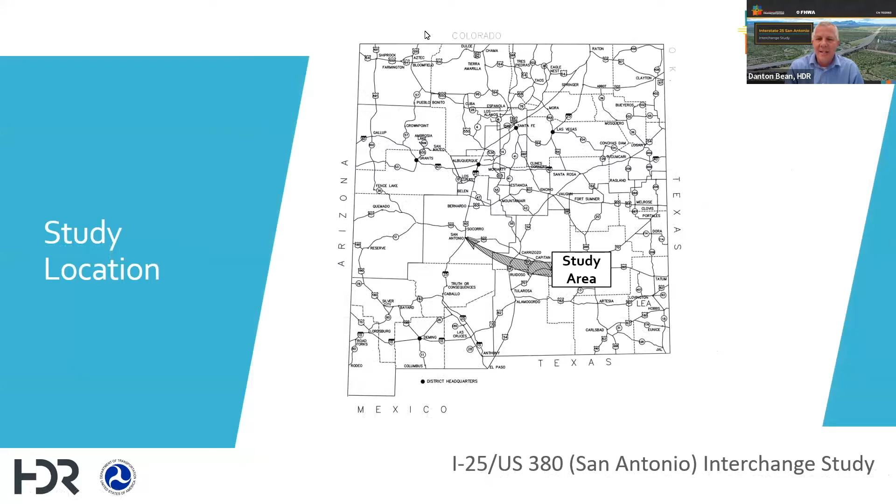So first, I want to describe the location of this study. The study area is just outside the community of San Antonio, about 10 miles south of Socorro, and about 90 miles south of Albuquerque.

The study area consists of the interchange of I-25 and US 380 and all the ramps of the interchange, between milepost 139 and 140 on I-25, and approximately a half a mile of US 380. The study area also includes a portion of Walnut Creek, the major waterway through the interchange area.

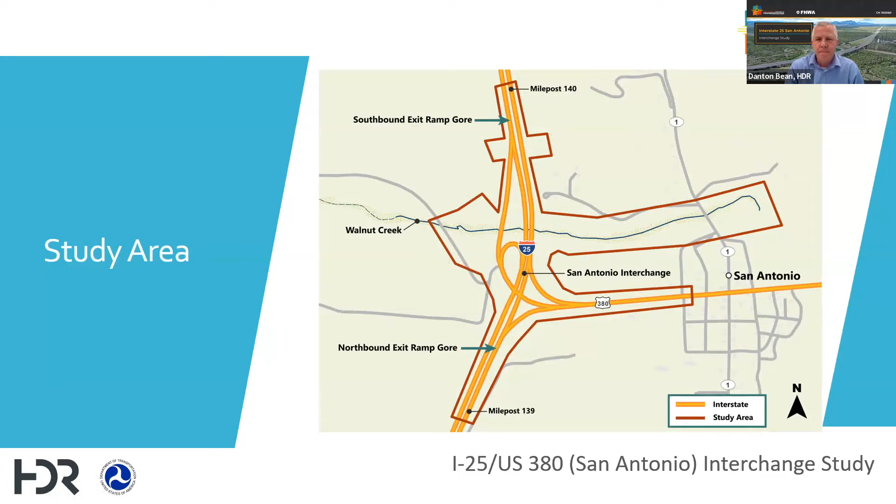All right, so now let's discuss more about the purpose and need. We'll get into depth about the needs that we've identified in the study area. In general, the deficiencies are in the geometry of the interchange, problematic features, and aged and dilapidated elements within the interchange. The purpose of the study is to improve safety, and it will be important to stay focused on that purpose as the study and project develop.

So now I'm going to turn the time over to Ravi for the roadway discipline to talk about the findings.

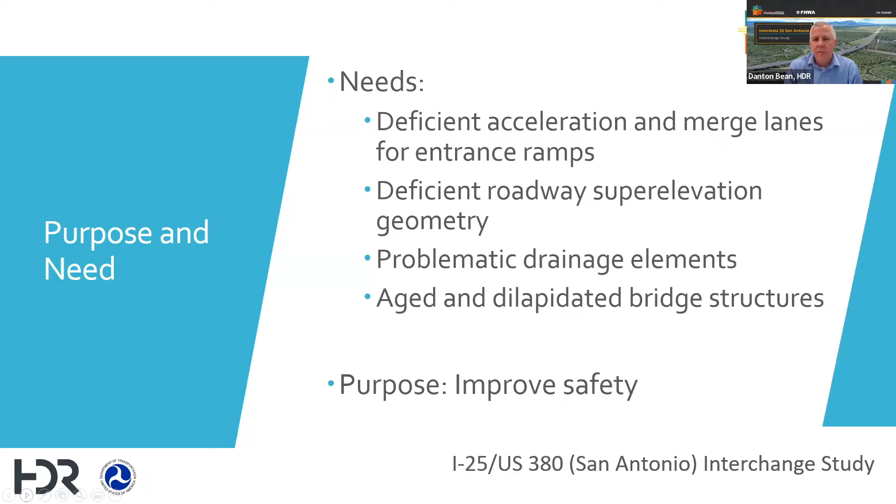Thank you, Danton. I'm Ravi Sripada, and as Danton mentioned, I'm the roadway lead for this project. I'll provide a quick overview of some of the existing geometry deficiencies that we intend to fix as part of the study. As you can see, both northbound and southbound on-ramps have deficient acceleration lengths to safely merge onto I-25 main line. 150 feet is available, while 1,160 feet is required, and for northbound, 1,580 feet is required.

Another safety element our team evaluated is the horizontal geometry of the I-25 roadway system. As the roadway alignment curves, the roadway surface is super elevated to help drivers maintain speed and stay safely on the road through the curve. Super elevation means raising the outer edge of the pavement above the inner edge. The speed limit on I-25 has increased since it was constructed, and now the existing I-25 travel lanes along the curve between US 380 and Walnut Creek do not meet current NMDOT standards. You can see the deficient super elevation along I-25 highlighted in blue on the slide.

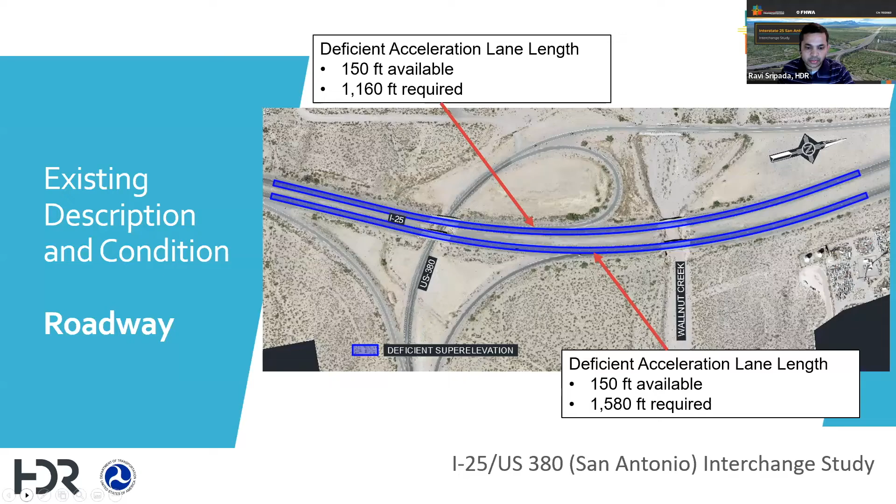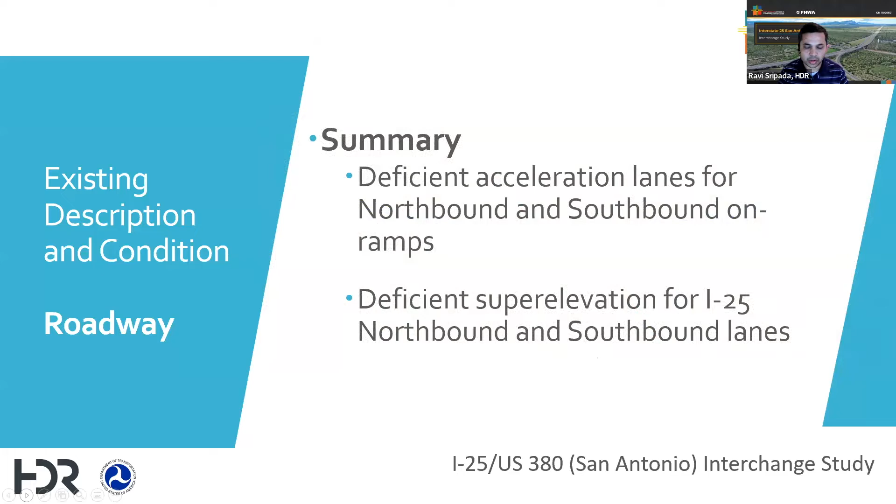In summary, existing on-ramps are not long enough to allow drivers to safely merge onto I-25. Also, the existing I-25 roadway surface along the curve is not sloped enough to meet the current speed of the drivers. Back to you, Danton.

Thank you, Ravi. So now let's talk about the bridge discipline. There are actually 5 structures in the study area that are considered bridges. The first one is bridge number 3168. That structure is a concrete box culvert. It has 20 cells or 20 barrels. It carries the southbound off-ramp over Walnut Creek, and that was built in 1939.

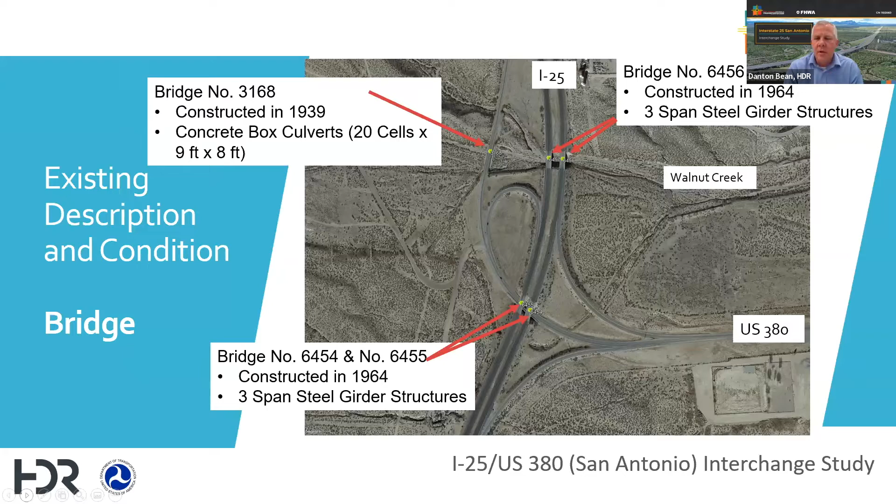The other structures carry I-25 over US 380 or over Walnut Creek. Those were all built in 1964, and they are 3-span steel girder structures. The structures are showing signs of age with cracking of concrete, delamination, and spalling. So in summary, all 5 bridge structures are reaching the end of their design life.

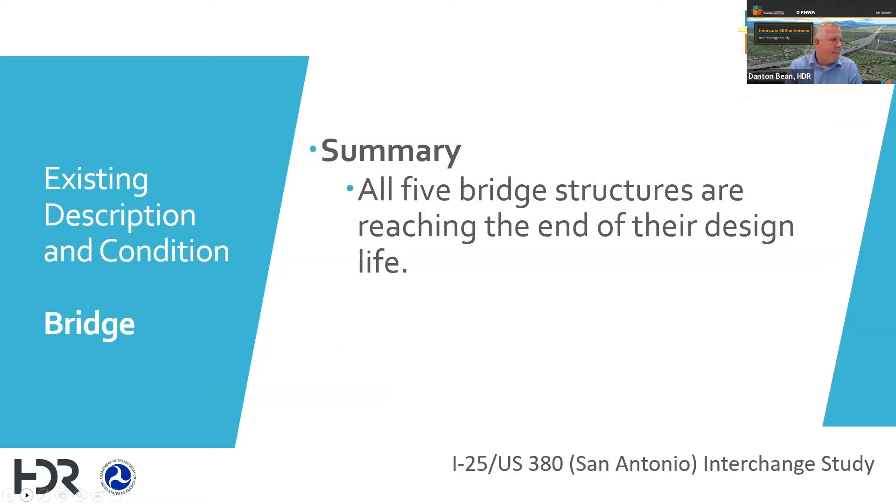So now I'm going to turn it over to Andrew to talk about the drainage discipline. Yeah, good evening. My name is Andrew Wong. I'm the drainage engineer for this study.

The drainage infrastructure for this project involves 19 drainage crossings. Incorporated in that, you have 25 culverts. As Danton said, there are 3 bridges - 2 of them are for I-25 over Walnut Creek, and then there's that 20-box culvert for the southbound off-ramp. So each of these elements has been studied to determine their conditions and whether they have the necessary capacity. Throughout the interchange, we did find significant sediment deposits and evidence of scour.

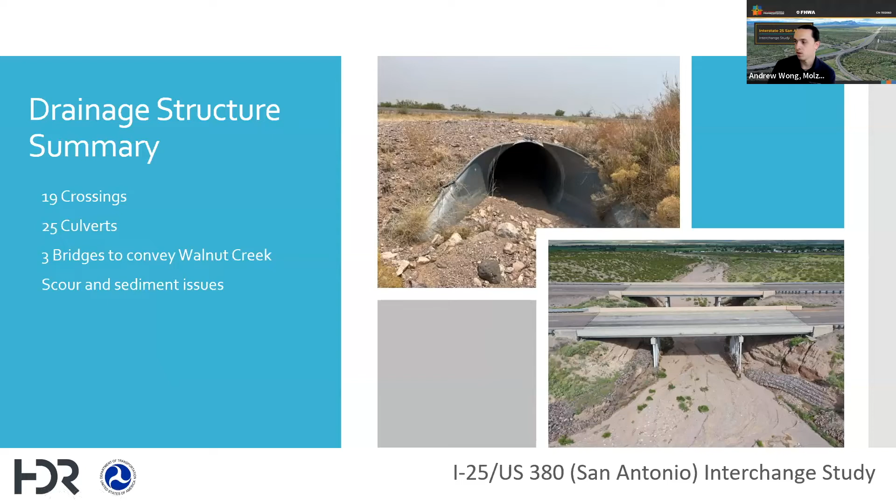So the drainage analysis began with determining how much water will be flowing through each structure. This depends on the size of the basin, the soil conditions, and the amount of rainfall historically experienced in the region. Walnut Creek, which flows through the interchange, is the largest of the drainage basins at over 30 square miles, which results in a peak flow for the 1% chance storm of over 19,000 cubic feet per second.

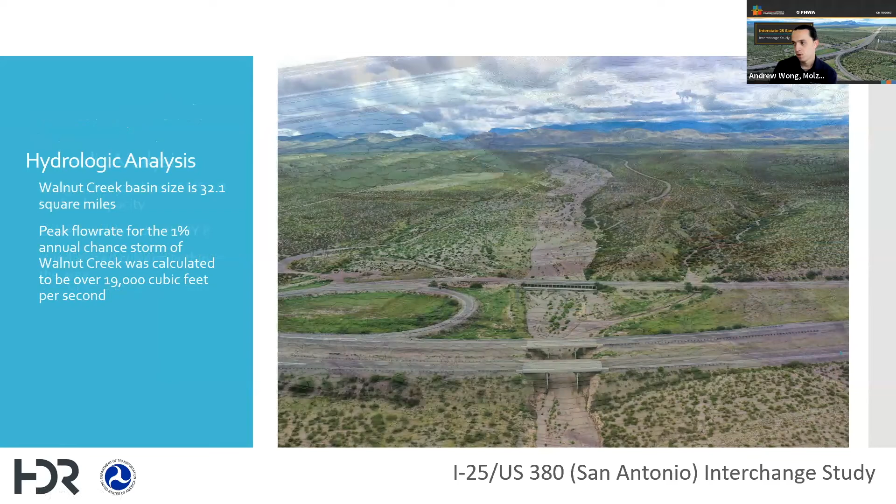So once we have those flows, we can perform the hydraulic analysis. This utilizes various different computer models, most significantly a 2D model that we used to analyze Walnut Creek and the bridges.

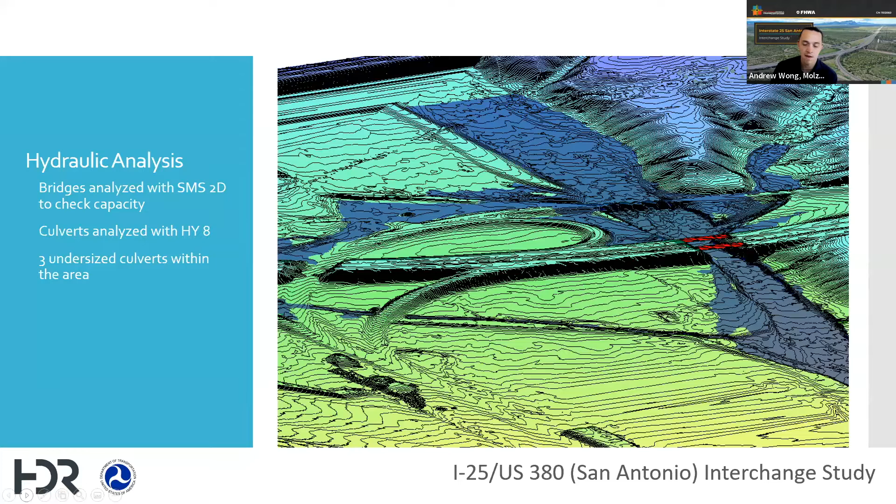So at the bridges, crossing waterways, scour is always a serious concern. Based off of our field visits, we did find quite a bit of erosive scour around the abutments and the piers. There was riprap protecting the slopes, but that has mostly washed away.

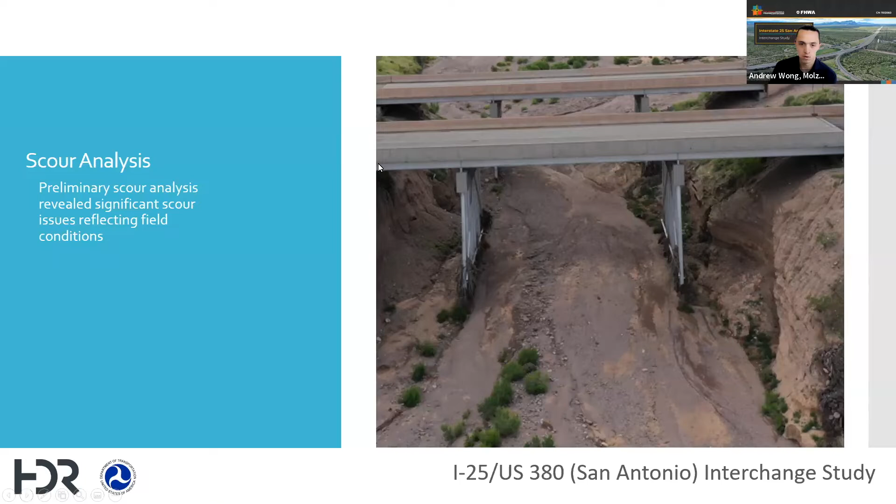There's some short-term projects being done to help stabilize the bridges, but our analysis indicates that these two bridges would benefit from some additional redesign to help ensure that the bridges can remain stable into the future. So I'll turn it back now to Randy to review the public comments we've received and the discussion from our first public meeting.

Thank you very much, Andrew. On November 16th, 2022, we hosted the initial public meeting to introduce this study. Between November 3rd and December 15th, 2022, we received 41 questions and comments, including 12 during our virtual public meeting.

It is important to note that we are listening to what the community is saying, and your comments are very much appreciated. We hear you, and we take what you say very seriously. The study team takes every comment we receive seriously, and we put a lot of value on what you have to say. A majority of the comments we received expressed concern about the current on-ramps, in particular the northbound ramp.

Improving the visibility and the safety of this stretch of highway was very clearly a priority for everyone, in addition to how the improvements will address flood control issues.

The good news is our study team and the public are on the same page. Safety is our number one concern. The issues that were brought up around the northbound on-ramp, the visibility issues, and the geometry of the ramps are all areas that our team has identified as issues that will be addressed by this study.

When it came to questions about traffic and traffic control plans, those plans will be developed in the final design phase of this project. Maintaining all of the movements in the interchange will be a priority for the design team. They will do all they can to limit closures and traffic restrictions. The intention is to leave things open as much as possible to minimize the inconvenience to the traveling public.

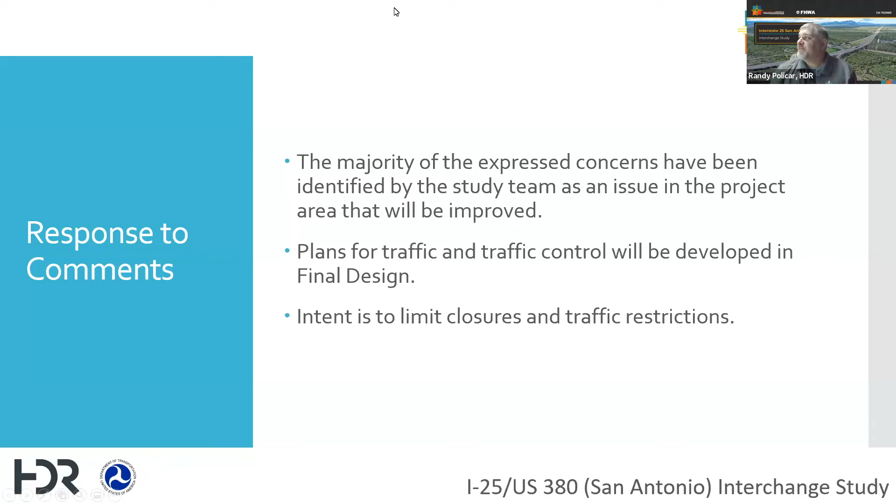We wanted to share with everyone an update to a few comments received from our first public meeting. The first update pertains to Walnut Creek. The NMDOT currently has a project in place to mitigate the erosive conditions at Walnut Creek. Improvements consist of grading, installation of concrete drop structures, gabions, riprap, median drop inlets, and culvert pipes. The construction for these improvements is anticipated to begin in the fall, winter of 2023.

The second update pertains to the existing I-25 northbound and southbound entrance ramps. As mentioned earlier in this presentation, the existing ramps provide deficient acceleration length and merging distance, poor sight distance, and geometry. The NMDOT will be installing advanced signage for I-25 traffic to utilize the passing lane when approaching the entrance ramp merging area. This is the layout for the new signs that will be installed.

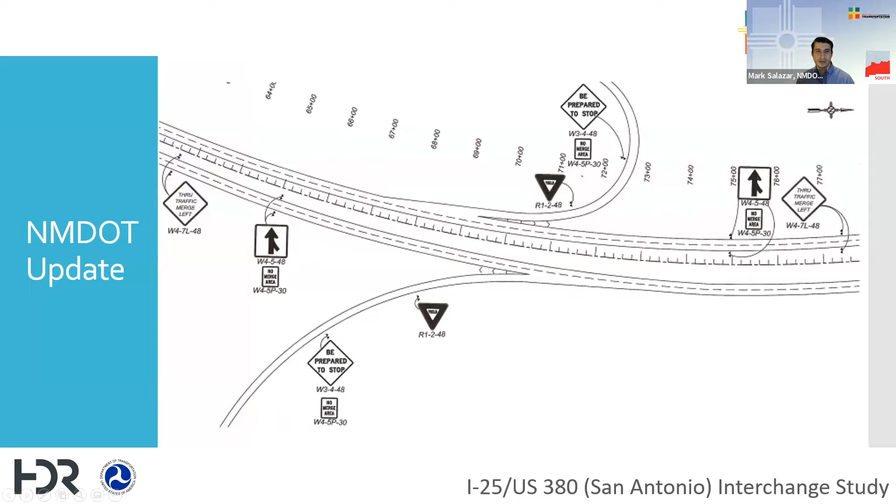The third update pertains to pavement preservation. The NMDOT is pursuing a pavement preservation project for the I-25 main lines from milepost 140 to 150 in the near future, maybe within a year or two, dependent upon funding. This is an exhibit showing the I-25 pavement preservation limits.

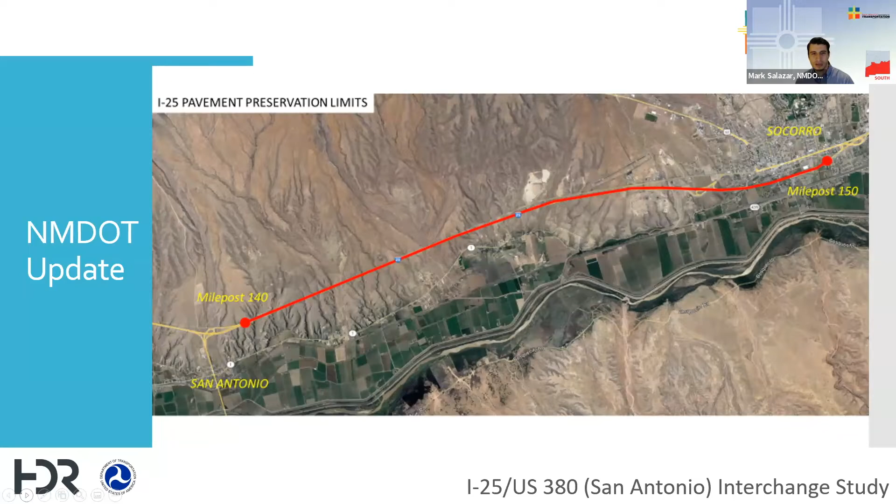I will now turn it over to Danton to continue the presentation. Thanks, Mark. So let's continue talking about our study. We are currently in the study phase. This is the second public meeting in the study effort, and again, to seek your input and comments.

The purpose of the meeting is to go over the alternatives that have been evaluated in detail as part of this phase B and review the comments, the recommendations from the team. We want your insights and feedback to help guide the decision-making process. Once we have received your input, we finish our evaluation process. The study document will be finalized, and we'll identify the improvements to be carried forward.

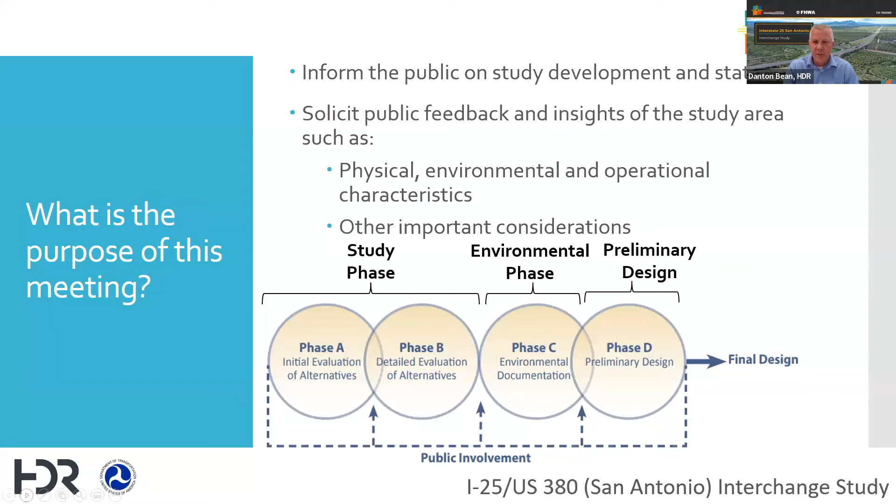Okay, so I won't review all of the needs again, but it's important to keep track of the purpose of the project, and that is to improve safety. Safety is always a top priority for the team, and so we are studying ways to do that. Those needs, again, in general sense, are to improve the geometry, solve some problematic elements, and replace aged and dilapidated structures.

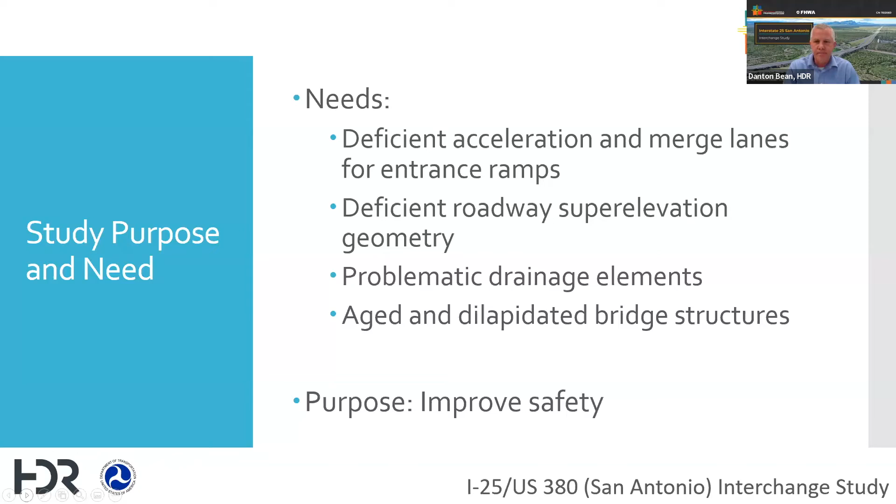So now let's talk about the alternatives that were presented again in the last meeting. We've tried to establish those needs, and these alternatives are the solution. The no-build alternative is always considered in the development of a project. The no-build alternative means that no improvements or modifications would occur. The study team has developed 3 different build alternatives to address and mitigate the issues identified in the roadway, drainage, bridge structures.

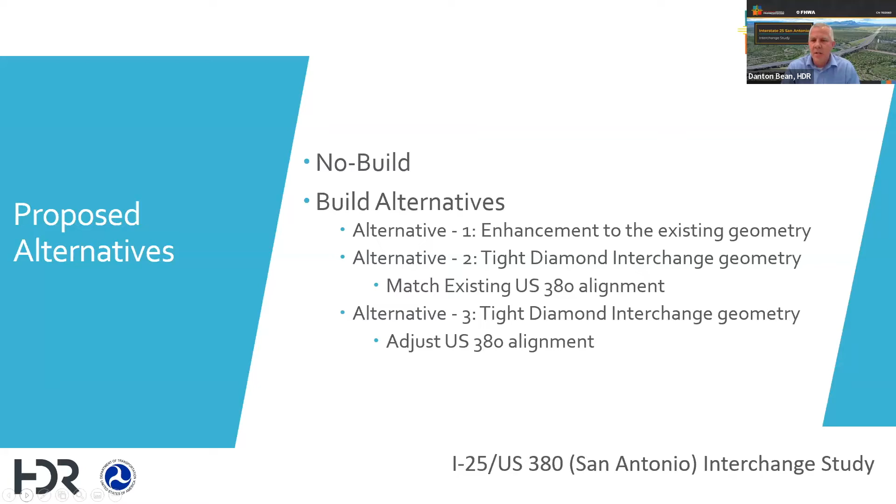The alternatives include: 1, an enhancement to the existing geometry; 2, a tight diamond interchange geometry matching the alignment of US 380; and 3, again a tight diamond interchange, but with an adjustment to the US 380 alignment.

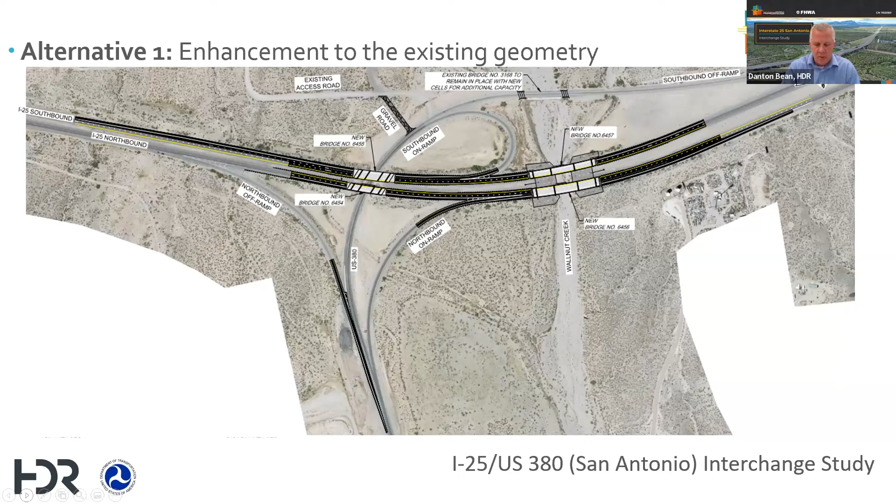So the advantages in this alternative are: first, there's a minimized construction cost, and it stays within the current right-of-way footprint, so there would be no need for additional right-of-way. Also, there's the addition of those proper on-ramp lengths for acceleration and merging onto I-25, and the improvements to Walnut Creek. The disadvantages are that the structure for the southbound off-ramp will remain in place, and that's a potential for flood issues and maintenance issues in the future.

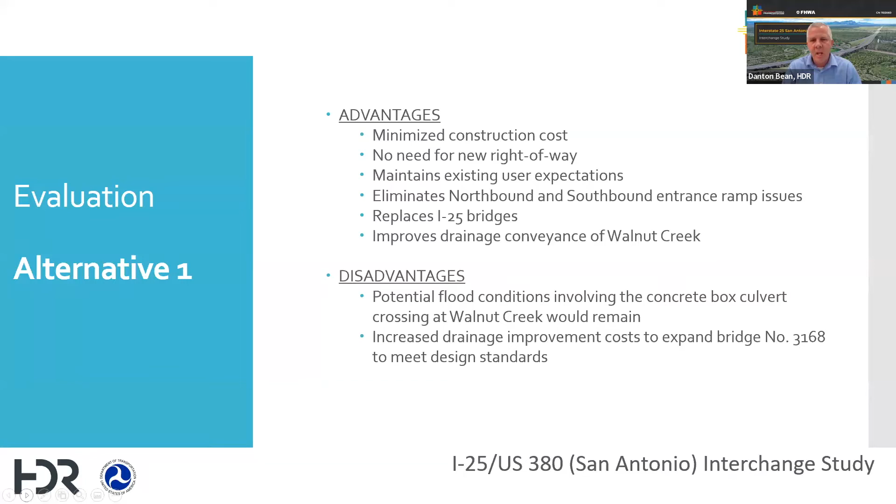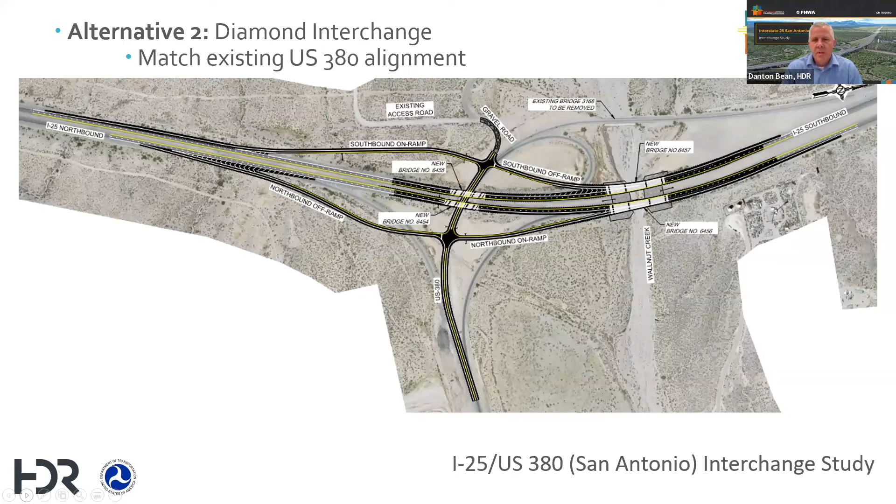So the advantages of this alternative are that it meets current driver expectation. The diamond interchange is a modern interchange type and it meets those driver expectations. It removes that concrete box culvert from the inventory and reduces the risk of flooding. It replaces those bridges for I-25 and improves the drainage conveyance through Walnut Creek. The disadvantages for this alternative are an increased cost compared to alternative one, and it would require temporary closures of US 380 during construction of the bridges, during demolition, girder placement, and deck pours.

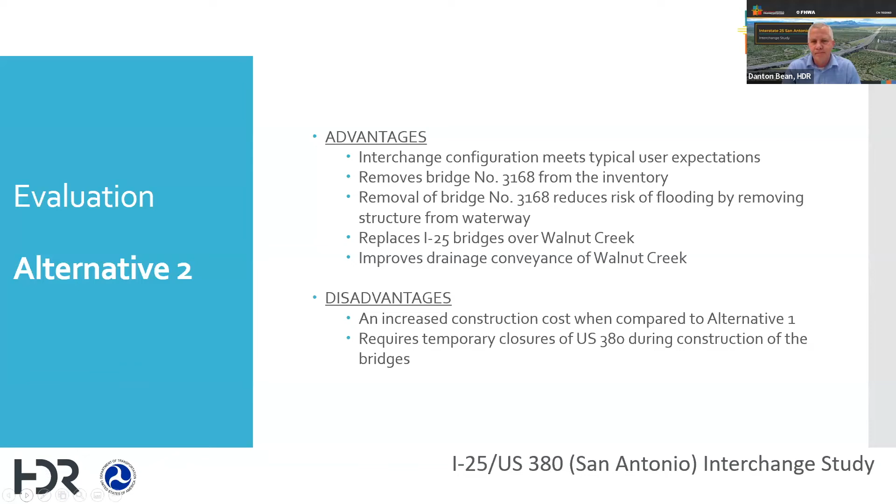Okay, alternative three is similar to alternative two. It is a diamond interchange, and the improvements are again similar, adding ramps that meet current standards, reconstructing I-25 through the horizontal curve to provide the proper super elevation, replacing the bridges on I-25, improving the Walnut Creek channel including erosion control and channel improvements, and removing that structure for the southbound exit ramp over Walnut Creek. So advantages are real similar to alternative number two,

with the exception that this alternative does not require closures of US 380 during construction, and I feel like that was a significant advantage for this alternative. The disadvantages are an increased construction cost compared to alternative one and alternative two, and there would be some right-of-way needed associated with this alternative.

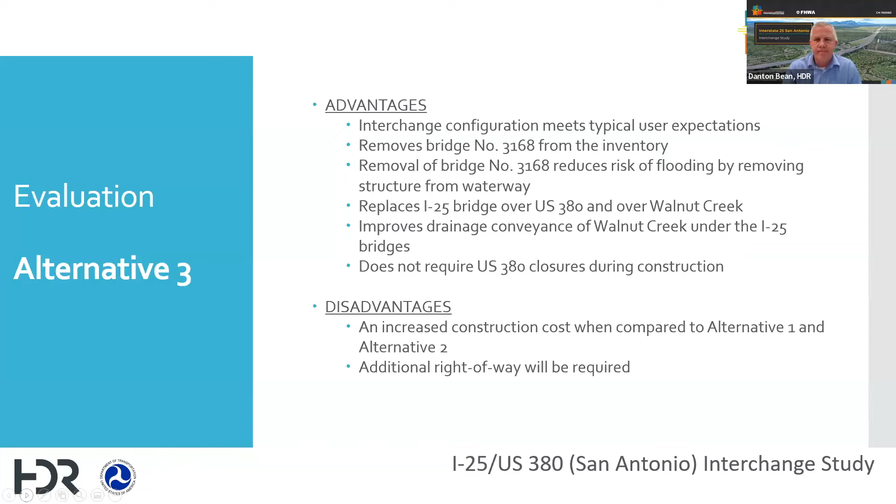All right, now I'm going to turn it back to Andrew to give us some information on the proposed improvements for the drainage system. Yeah, so each of the alternatives that Danton described would involve some drainage improvements. There are a few priorities we'd keep in mind for each of them. The first would be to make sure none of the improvements have any negative impacts on the downstream areas. The second priority is to make sure the new interchange doesn't flood and will continue to be operational for the design storms. And finally, the goal is also to reduce the regular maintenance required due to scour and sedimentation, and to help extend the operational life of the project far into the future.

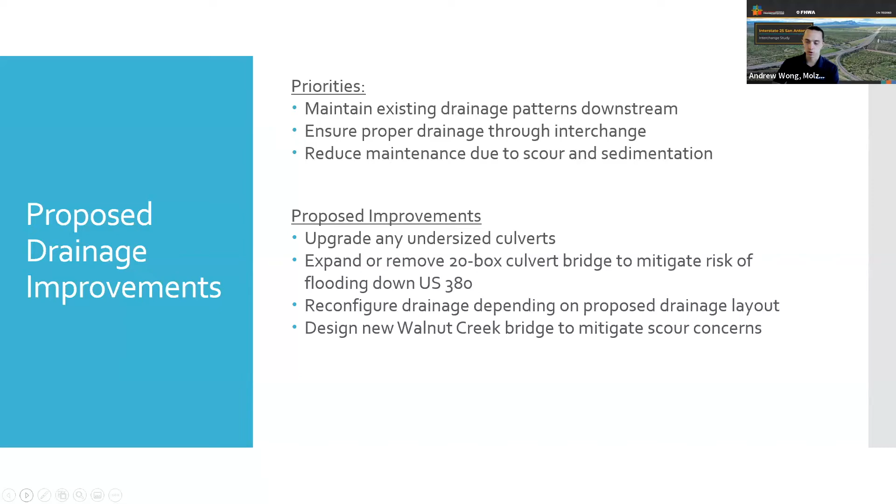So for this interchange, we are recommending that any undersized culverts be upgraded. There are a few that will need to be removed or extended depending on how the interchange is modified. Each of the proposed alternatives involves either improving or removing the 20-box culvert that contributed to the 2018 flooding, so that would no longer be a concern. The most significant drainage improvement is recommending that the Walnut Creek Bridge be redesigned to help benefit water flow through the channel, as well as reduce the scour concerns for that bridge. Back to you, Danton.

Okay, so now let's talk about the evaluation process the team went through with these alternatives. We evaluated each alternative considering the purpose and need, or how well does this alternative fulfill the purpose of the project and the needs of the area. The second criteria was cost, which includes construction cost, right-of-way costs, and future maintenance costs. We also looked at these alternatives with engineering factors and environmental factors.

The other thing important in this discussion is to recognize the evaluation scoring. We evaluated these alternatives from very positive, which we represent with a double plus sign, to very negative, which we represented with negative symbols.

I won't repeat the purpose and need of the area, but it's important to remember that we're trying to improve safety to keep us on track on that target. The no-build alternative really does nothing to improve safety, so it is evaluated as very negative. The other alternatives do improve safety, and we've evaluated them as very positive.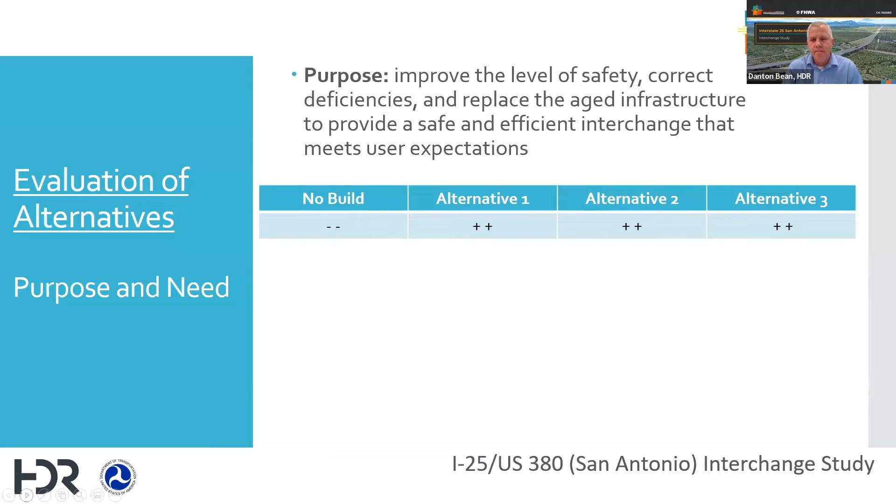Now on the cost criteria, all of the alternatives will require some cost, either construction or future maintenance. We've scored the no-build and alternative number one as negative. No-build would require future maintenance costs, and alternative one has elements of construction cost. Alternatives number 2 and 3 have higher construction costs and are evaluated as very negative.

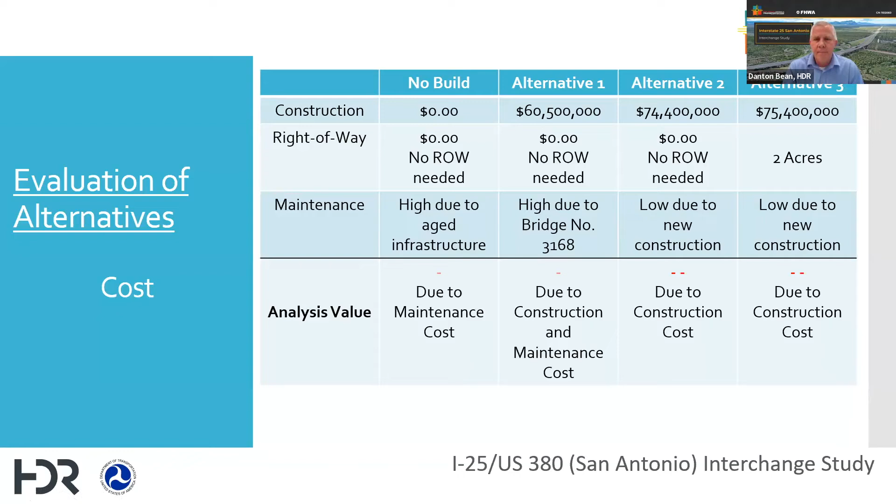Now let's talk about the engineering factors. For the evaluation of these categories, we examined each alternative with the categories listed in the first column. This slide shows how each alternative was ranked for the different categories. I won't discuss in detail the evaluation of each category, but I'm going to try to summarize the differentiating aspects of the evaluation.

The no-build alternative was valued as very negative for several categories. First was safety - there's no improvements for safety, and the entrance ramps would stay as is. Second, maintenance - the old infrastructure would require significant effort to keep them going. Third is drainage - no improvements to Walnut Creek is a concern for the team. These negative scores for the no-build alternative really eliminated it from consideration. The study team will not recommend the no-build alternative.

Now let's talk about another differentiating criteria. In the first public meeting, we heard how important it is for you, the public, those that are users, to maintain traffic flow through the area during construction. So we put significant weight to that category, and it's a significant differentiator for the alternatives. Alternative number 1 will have a significant impact to traffic during construction and is valued very negative. The construction of those ramps to add acceleration and merge length would require closure during construction, so we value that as very negative.

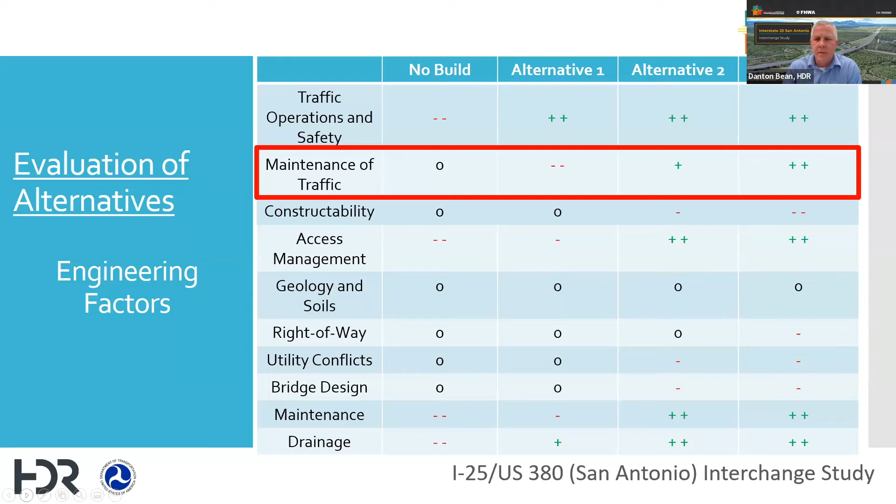Now let's talk about the environmental categories, and I'll turn it over to Maria to help with that discussion.

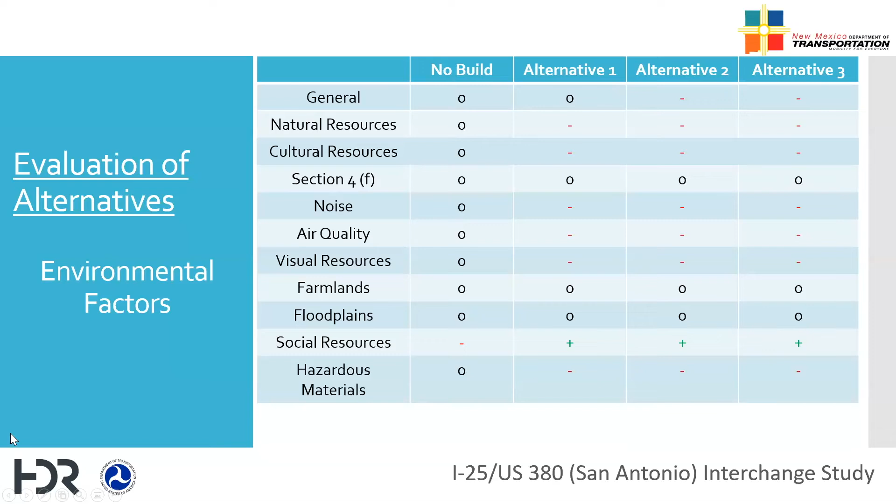Thanks, Danton. My name is Maria Altemus. I am the environmental planner with HDR for the project. When looking at the three alternatives, we examined each of the resources or categories listed in the first column there on the screen in relation to the no-build and the three action alternatives. You'll see how each category was ranked based on the criteria, or the scoring method that Danton described before. So 0 is neutral, minus is negative, and plus is positive.

You'll see that overall, the no-build alternative has a negligible or no effect on almost all the categories, since if there isn't anything built, it won't be affecting the environment. The only category where the no-build has an effect one way or the other is social resources, which takes into account community resources, demographics, and economic and land issues. The no-build alternative would have a negative effect on social resources because it wouldn't improve the interchange, and the interchange is a safety concern for drivers and community members in the area. The build alternatives would have a positive effect because they'll improve the interchange, upgrade the bridge, and improve safety.

Moving up to the first row, when we look at the general environmental setting, alternative 1 stays within the existing right-of-way and the existing roadway alignment, so there really wouldn't be an effect to the general environmental setting. Whereas for alternatives 2 and 3, the roadway alignment is slightly shifted and would impact the environmental setting slightly from its current condition, hence the slightly negative impact there.

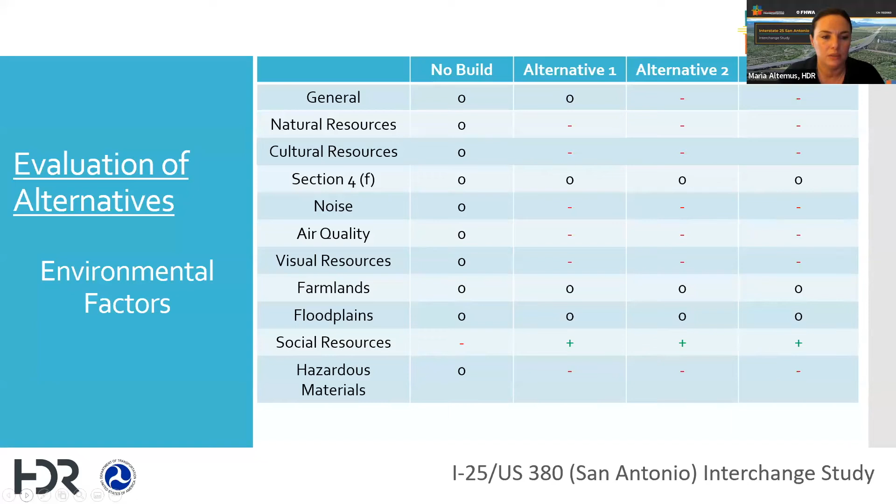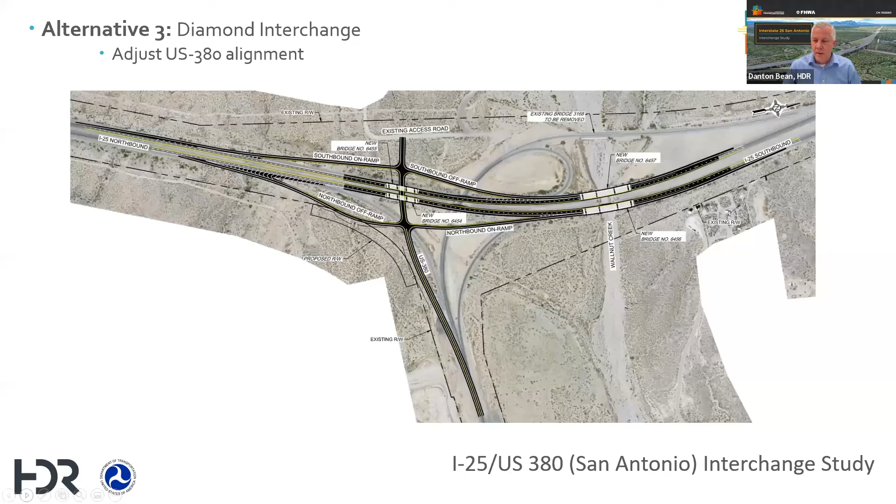And with that, I'll turn it back over to Danton to discuss the recommended alternative. Thank you, Maria. So based on that evaluation, alternative number 3 is the recommended alternative to be advanced into the environmental investigation and design phases of the project. This is definitely one of the areas that we need your comments and input on, and so we look forward to receiving that.

Okay, so now let's talk about our next steps. We started the study in the spring of last year and expect to complete it here this summer. The preliminary design and environmental investigation and documentation efforts will start up soon, and we expect to complete that by the summer of next year. That will then roll into the final design efforts. At this point, the construction funds have not been programmed, so the construction schedule is not known.